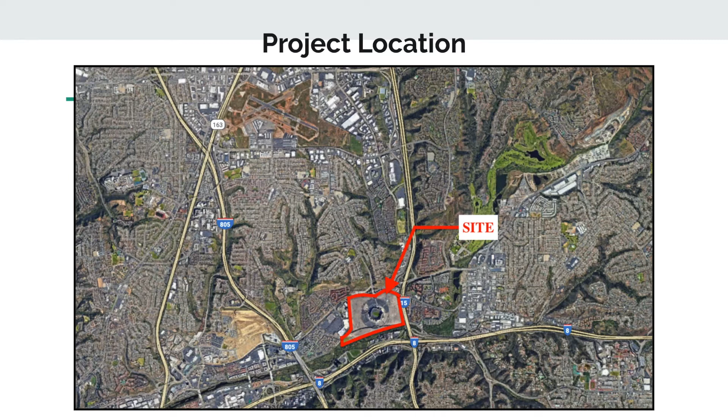Our project location is at the intersection of the 15 and the 8 freeway on the current Qualcomm Stadium lot. Existing conditions were assumed to have developed the recycled water and the pure water lines on campus. This scope of the project was to design water and research alternatives to get the water onto campus, not necessarily designing the pipelines on campus, but just getting the water to the campus.

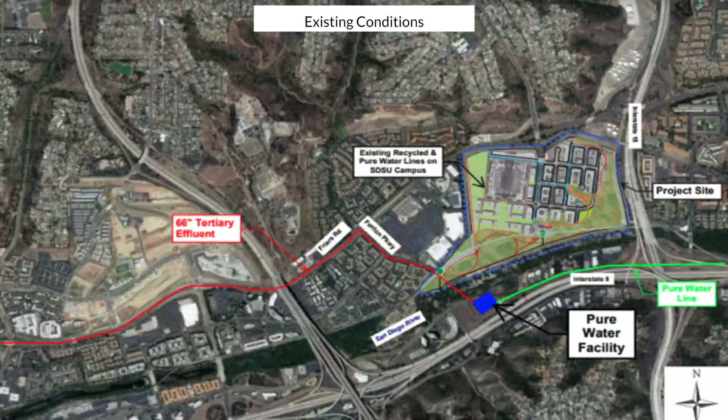So we were designing and researching layouts for potable and recycled water usage, such as drinking water, irrigation, fountains, cooling towers, dual plumbing, and the Mission Valley Terminal. This proposed pure water layout, the demand for the pure water was 2 million gallons a day. We're pulling the water from the facility prior to the pumps that send it to Lake Murray, using two 30 horsepower pumps. One's a backup, one's operational.

The water gets put into 12-inch pure water lines that are brand new and being tunneled under the San Diego River using the existing tunnel. And it gets tied into the existing Mission Valley network. There's a duckbill valve to prevent the backflow of the water flowing back into the lines.

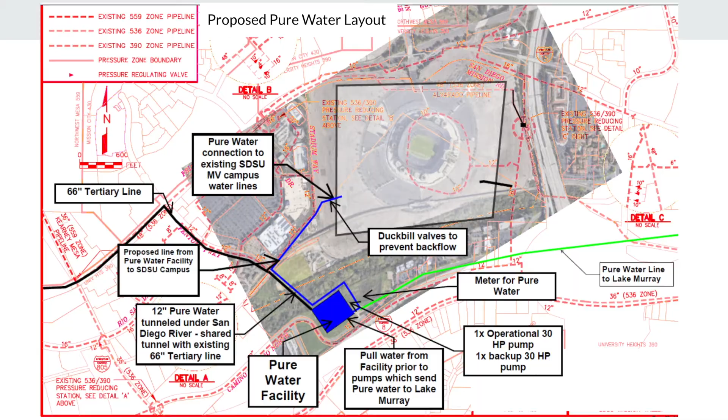Yeah, so the water's coming this way. We'll describe the major areas for potential uses of water. Uses were split into categories based on alternative source water. Our alternative 1 was recycled water, alternative 2, pure water, and alternative 3 was water that could be reused. In our alternative 1, we had recycled water, which the demand was 2 million gallons per day, and recycled water could be used for our cooling towers, our irrigation, dual plumbing, and fountains.

For alternative 2, pure water could be used for potable uses such as housing, stadium, retail, campus, and hotels, as well as an innovation we were proposing for a homeless sanitation station and the Metropolitan Transit System. For alternative 3, our reuse could be from the cooling tower blowdown, which could be used for irrigation and fountains. And finally, we would have additional source water being used for municipal purposes, fire demand, and a backup source of water for the Mission Valley campus.

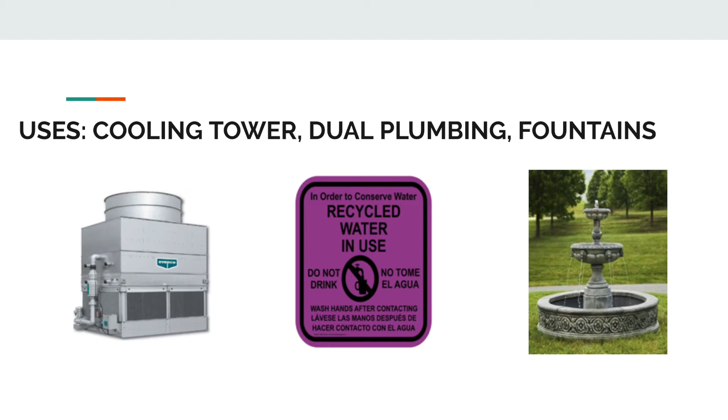Installing a dual plumbing system will allow our campus to operate its water more efficiently. Dual plumbing will use disinfected reclaimed water to provide water for toilets and urinals, as well as additional water needed for irrigation. The price of installing dual plumbing is not considered in this proposal. An assumption is made that the dual plumbing systems have already been installed, and it was determined that the best cost approach would be with dual plumbing and using pure and recycled water.

Additional uses that we accounted for on this project were the MTS trolley station that will be on the SDSU Mission Valley campus. We calculated that the trolley station will use around 39,933 gallons per day of water. In regards to irrigation, we have multiple different uses that we calculated daily gallon per day uses for, including soccer fields, the main football stadium, baseball fields, parks, and landscaping, and that totaled to 267,000 gallons per day of water.

And lastly, for our innovation, instead of having a recreational facility such as a water park or something like that, we chose to make a homeless sanitation station, which will include multiple showers and restrooms for the homeless population in the San Diego area to use.

This will promote a better health and hygiene standard around the SDSU campus. So in the next section, we'll talk about the cost for this project.

The cost analysis for this project, we decided that there were two main components: the capital cost and the actual water rates for the two options that we decided to run with. One being 100% of the potable water for SDSU being provided by the city of San Diego, and the other being all of the potable water being provided by Pure Water.

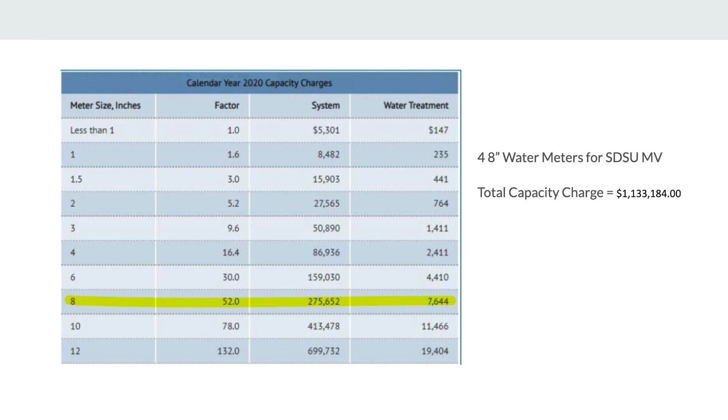This table here shows the capacity charges if the water is supplied by the city of San Diego. It was assumed that 4 8-inch master water meters would be used from a water system analysis prepared by Dexter Wilson Engineering. The total capacity charge came out to be $1.1 million.

The capital cost associated with the Pure Water is shown here. Really, it's the cost of materials and also the cost of construction for the pipeline that would be needed to get pure water from the Pure Water facility to SDSU Mission Valley. The materials can be seen here.

What is also included in the capital cost for Pure Water is the permitting that is needed to get permission from the city to use a tunnel to get under the San Diego River back over to SDSU Mission Valley.

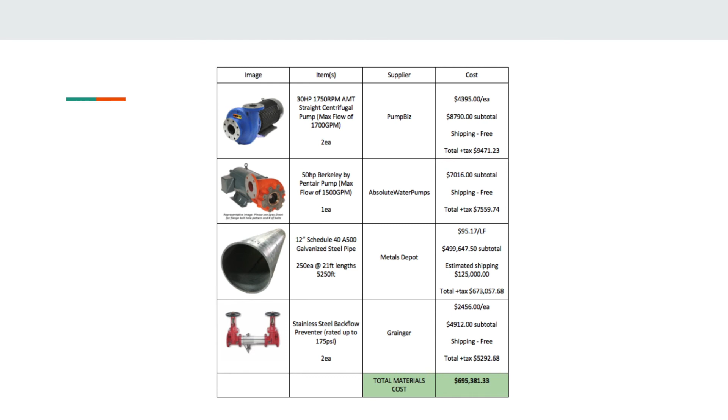So here is shown the capital costs that we came up with. Pure Water is more based on the materials and construction that's needed. Construction for a water pipeline comes out to around $2 million per mile, which is approximately what we had.

Below that, you can see the table for what it costs per day for all of the water rates. We got these from various sources that can be found in Appendix 5. All of these we decided to equalize in the year of 2020 to get a good starting point for each of them. As you can see, the potable water from the city is more expensive than pure water, and the city needs to pay around $11,000 a day to import this water.

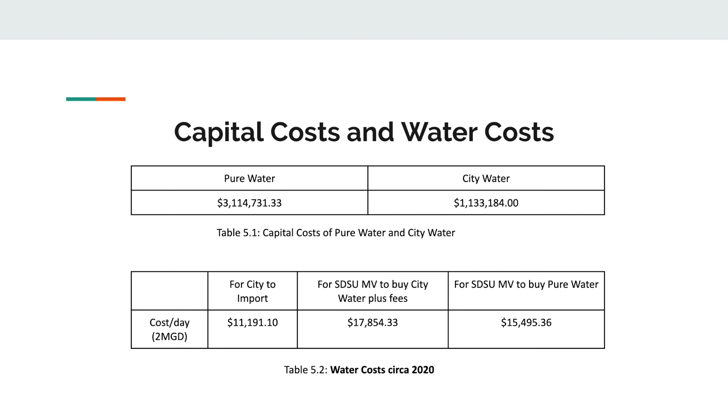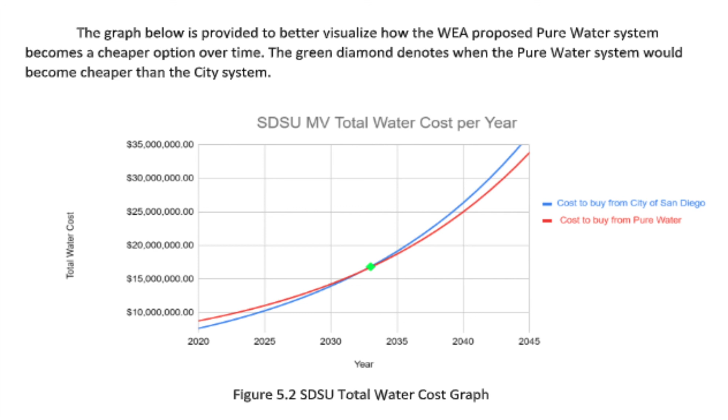After this, not only will SDSU be saving money, but the city will save money by not having to import any water. This all comes together in a win-win scenario where the city saves water, the city saves money, SDSU saves money by buying it at a cheaper rate, and Pure Water gets more exposure for supplying SDSU with high-quality water at a lower price.

WEA's final recommendation for this project is to pull 100% of the potable water from the Pure Water facilities and 100% of the recycled water from the city. The rest of the water in the system will come from cooling tower blowdown being put back to the system. The final recommendations for the layouts is to include the pumps and the pipe layouts that we mentioned earlier in this presentation.